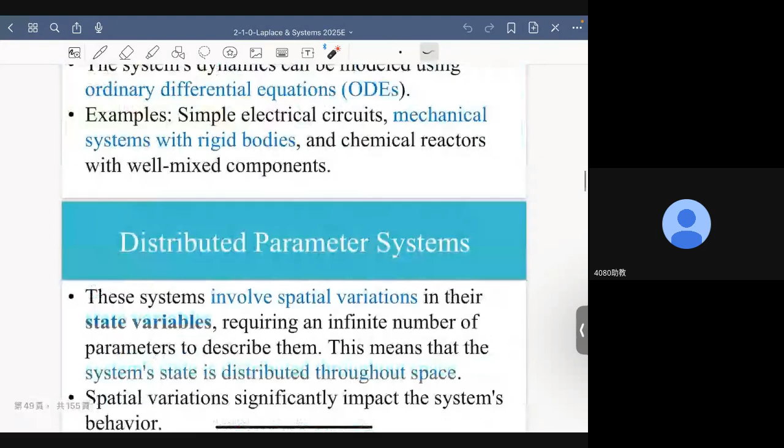OK. Now one fundamental difference between these two courses, the course of dynamics and the course of mechanics of materials, is that in the course of dynamics, we only deal with rigid bodies. We only deal with lumped parameter systems. In the course of mechanics of materials, we deal with flexible bodies. We deal with distributed parameter systems.

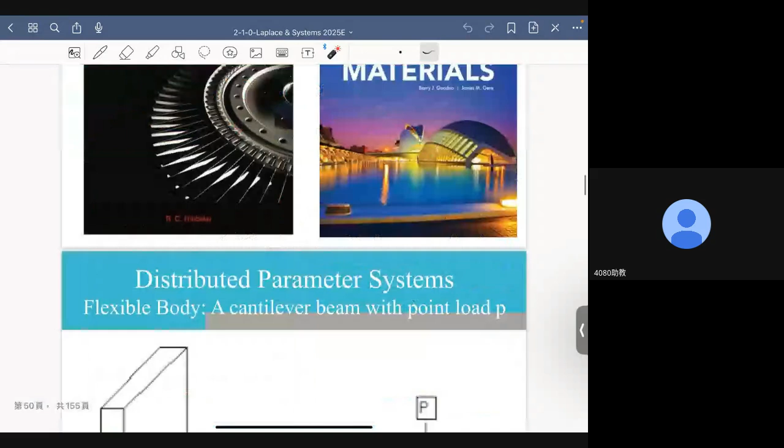For example, let's look at this cantilever beam. This is a beam. Let's say you apply a force here, and what will happen is this beam will deform. And the amount of deformation depends on two variables. One is time, the other is what? Space, right? At a different location of this beam, we have different amounts of deformation.

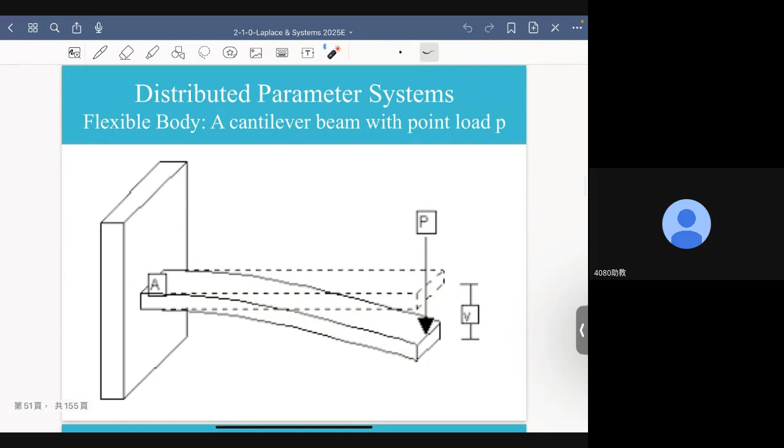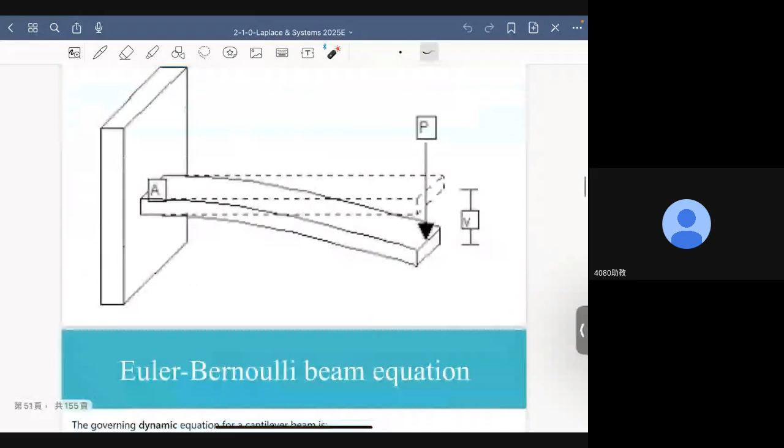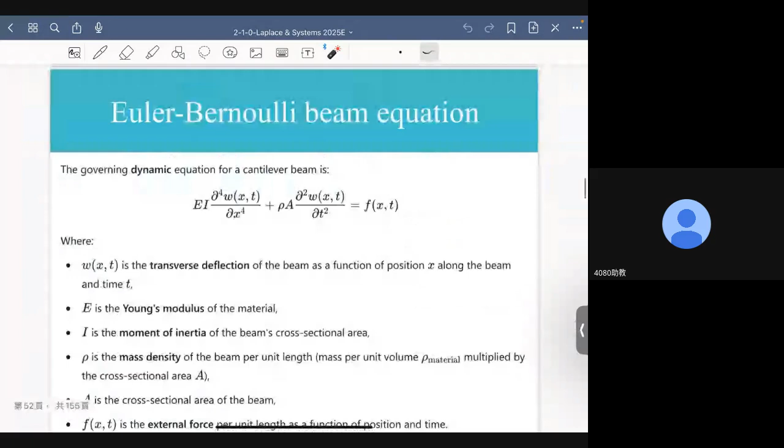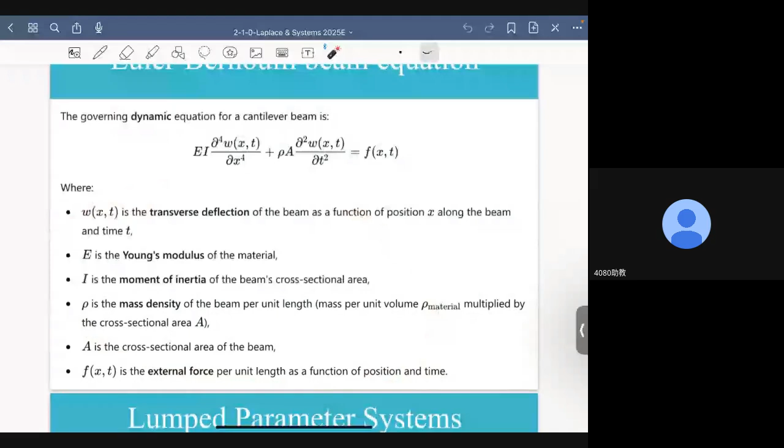And if you go to a course or a textbook of mechanics of materials, it will tell you that you can describe such a phenomenon by the so-called Euler-Bernoulli beam equation, which is a partial differential equation involving two independent variables: a variable t, which is time, and a variable x, which is a spatial variable. What E and I mean, you can find their definitions here, but it's not what we want to focus on.

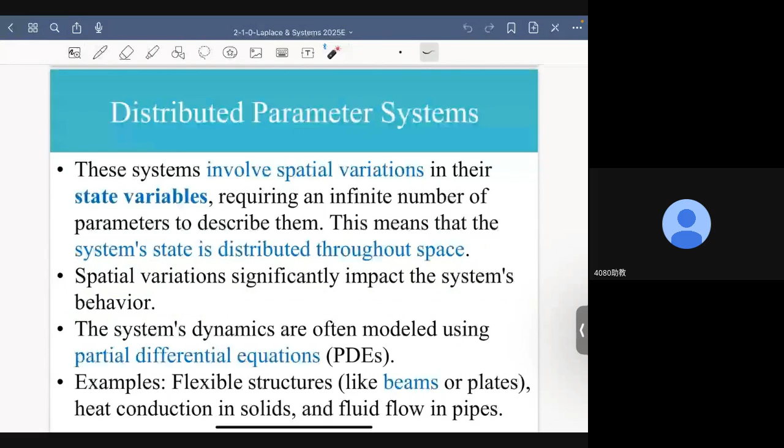What we want to focus on is that for distributed parameter systems, the system state is distributed throughout space, as demonstrated by the cantilever beam example. Spatial variations significantly impact the system behavior. This is the very reason why x now needs to be an independent variable, because the deformation of the beam depends on x. The spatial variation can no longer be ignored when we are dealing with distributed parameter systems.

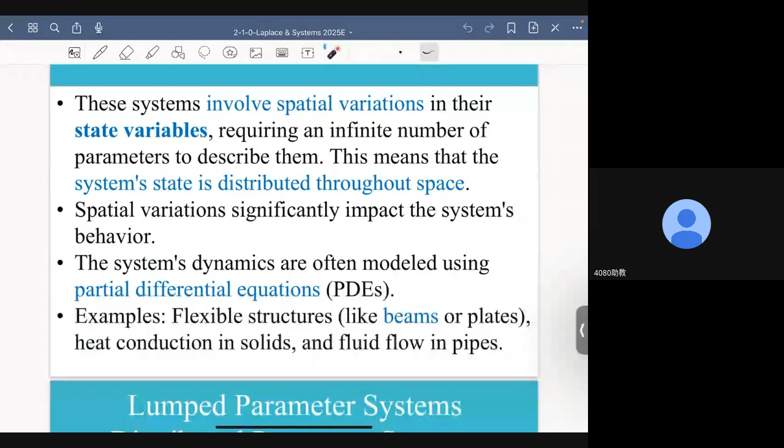So the system dynamics are often modeled using partial differential equations, which make the modeling process much more difficult, which means dealing with distributed parameter systems is typically much more complex and challenging than dealing with lumped parameter systems.

Now, a submarine is more like a lumped parameter system. It's more like a rigid body. By contrast, fish are more like distributed parameter systems. That is why the swimming pattern of a fish is much more flexible than a submarine. It can go around in very narrow space, it can accelerate instantaneously, and it can change its moving direction, I wouldn't say instantaneously, but at a very fast pace.

Similarly, a bird is more like a distributed parameter system, and an airplane is more like a rigid body. So we want to fly like a bird, not fly like an airplane, because if you fly like a bird, you don't need an airport, right? You don't need a very, very large distance to take off.

Now we will formally move into the analysis of control systems. And here I want to introduce, or help you review, one very important mathematical method for the analysis of control systems, which is the Laplace transform. Now, why do we want to use the Laplace transform? Using the Laplace transform can simplify the design and analysis of control systems.

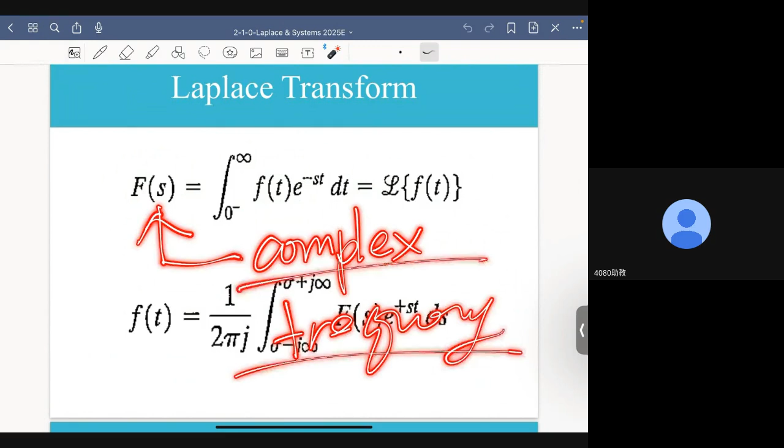Okay, we will talk about the property of complex frequency later. When you can go from t domain to s domain by using Laplace transform, you always want a way back. If I can go from t to s, can I go from s to t? I can do that by using inverse Laplace transform, and this is the formal definition of inverse Laplace transforms.

Typically, we are only interested in Laplace transform, not inverse Laplace transforms, because you don't need to perform inverse Laplace transform by yourself. You can always look at a Laplace transform table for inverse Laplace transform results. That is one reason. The other reason is that it's really not important for control system analysis, but understanding Laplace transform, by contrast, is of vital importance for the analysis and design of control systems.

Now let's look into the definition of Laplace transform to get a better picture of what it really is, starting from its lower bound and upper bound. The lower bound is actually starting from 0 minus. In control, we are usually interested in the causal response of the system. What is causal response? Causal response is the part of the response due to the input applied at t larger than or equal to 0, which implies that the input is initialized at the time t equal to 0. In control, what we are interested in is the causal response, the response caused by inputs.

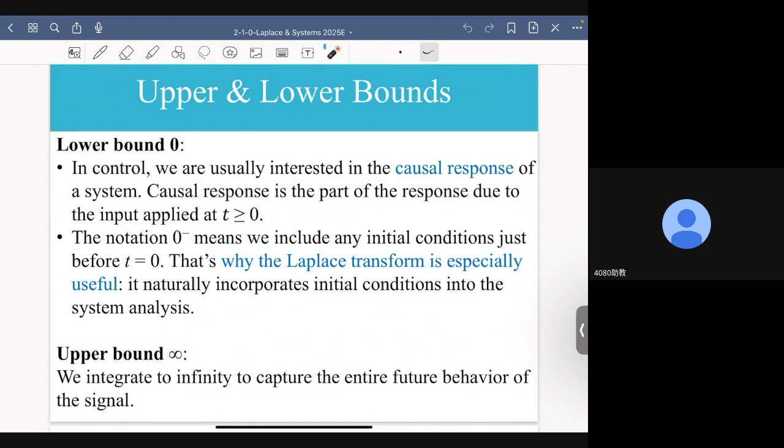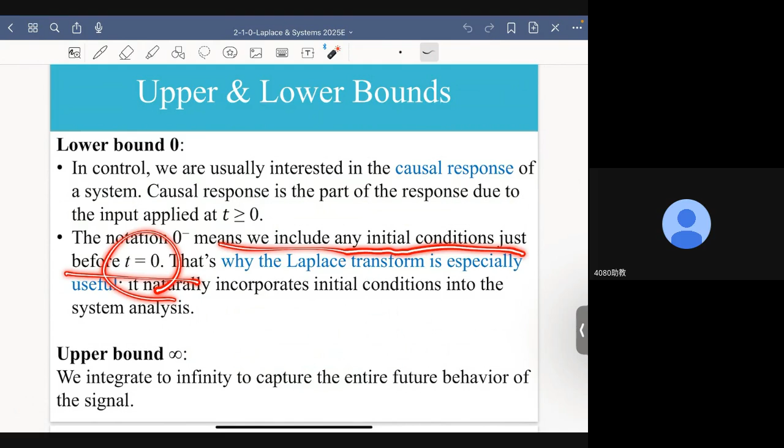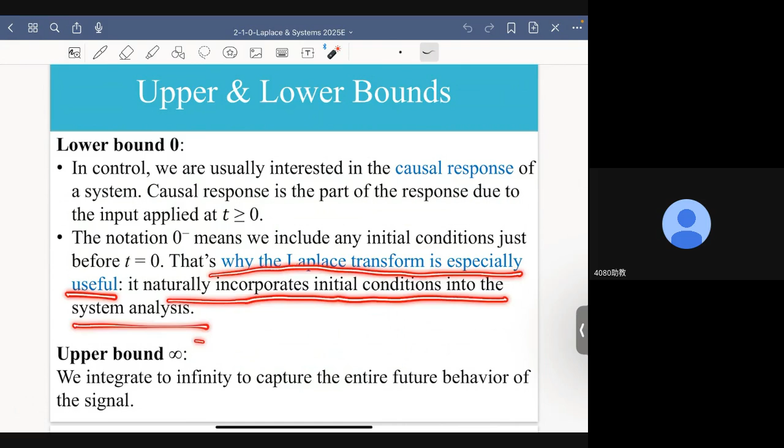Other than causal response, what is the remaining part of the response? As we shall see later, the response caused by initial conditions. The notation 0 minus means that we include any initial condition just before t equal to 0, which is the time instant of the application of the input. That's why the Laplace transform is especially useful. It naturally incorporates initial conditions into system analysis. So the reason why we have here not 0 but 0 minus is that Laplace transform takes initial conditions into consideration.

Because t equal to 0 is the time instant the input starts to have an impact on the system, and 0 minus means right before the application of the input. So it fully describes the state of the system before the application of the input; therefore it fully describes the initial conditions.

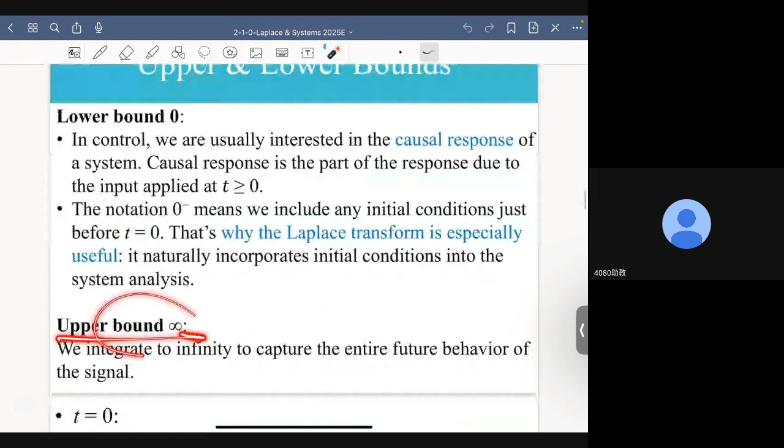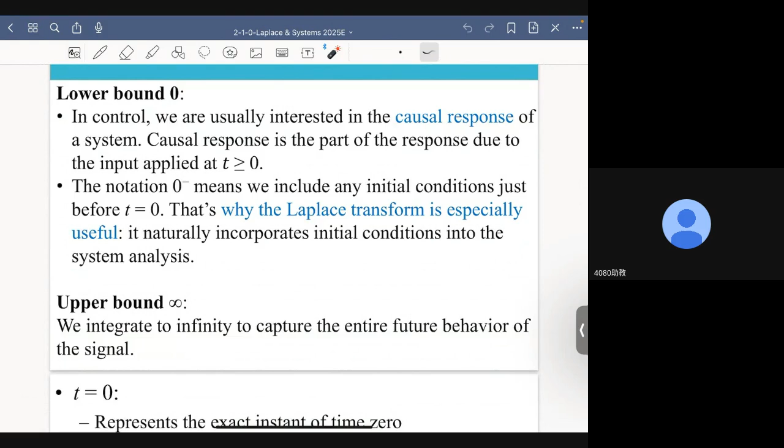Now, upper bound. Why is the upper bound infinity? Because we integrate to infinity to capture the entire future behavior of the signal. We don't know how long a signal will last. We simply have no idea because there are so many different kinds of signals in the world. So if that is the case, I just take the integration to infinity, and that will take every possible future behavior into account.

Let's spend more time on the specification of t equal to 0. T equal to 0 represents the exact instant of time 0. And t equal to 0 plus means t approaches 0 from the positive side. It represents the instant immediately after t equal to 0, and it is used to define the system just after the input is applied. It excludes initial conditions or the instantaneous change at t equal to 0.

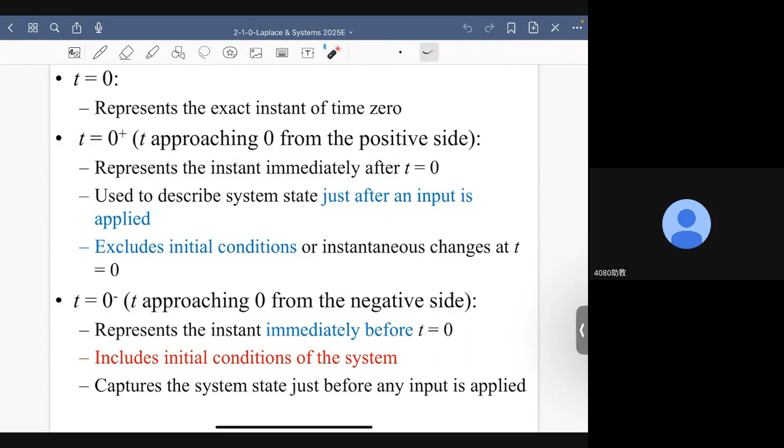By contrast, t equal to 0 minus means t approaching 0 from the negative side. It represents the instant immediately before t equal to 0. Therefore, it includes the initial conditions of the system. What really makes a difference is the application of the input. Because once you apply the input, you create a discontinuity between before and after the application of the input at t equal to 0. Therefore, we need to distinguish 0 plus and 0 minus. Where does the discontinuity come from? Input.

If you find me repeating the same thing again, it does not mean I suffer from dementia. I don't suffer from Alzheimer's. Not yet.

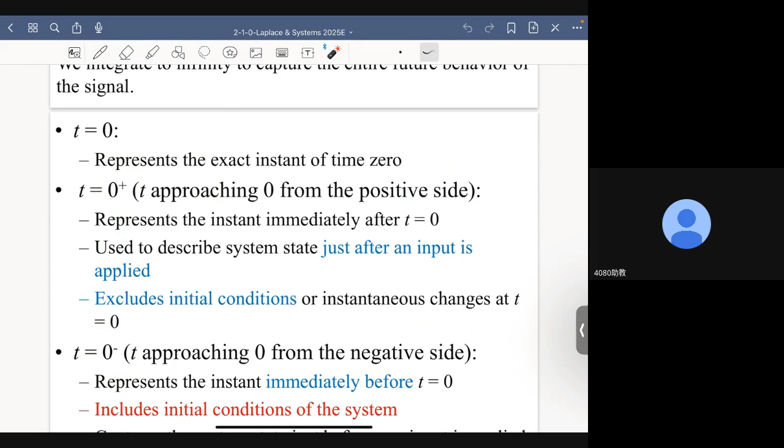I do that on purpose. I repeat the same thing again only when I think the concept is of great importance, and I want you to learn it by heart. That is, I want you to memorize them, to always have a good idea of what it is, because it will be very important.

Now, we talk about useful signal models. The first useful signal model we introduced is the unit step function. Remember that the equality sign is at t equal to 0, which implies if the unit step function is the input of the system, then its influence on the system begins at t equal to 0.

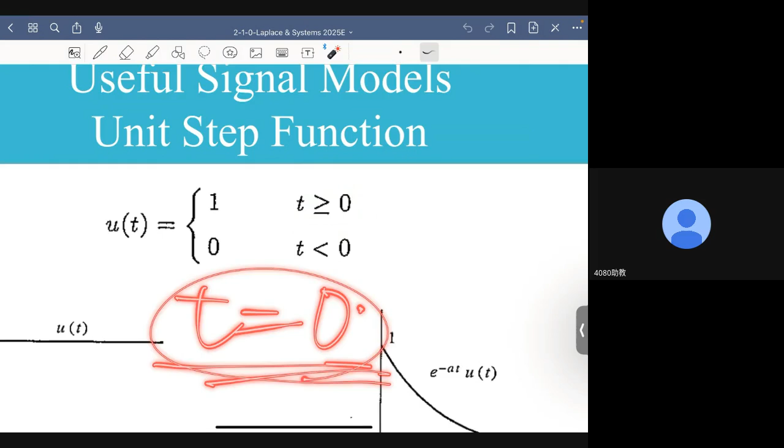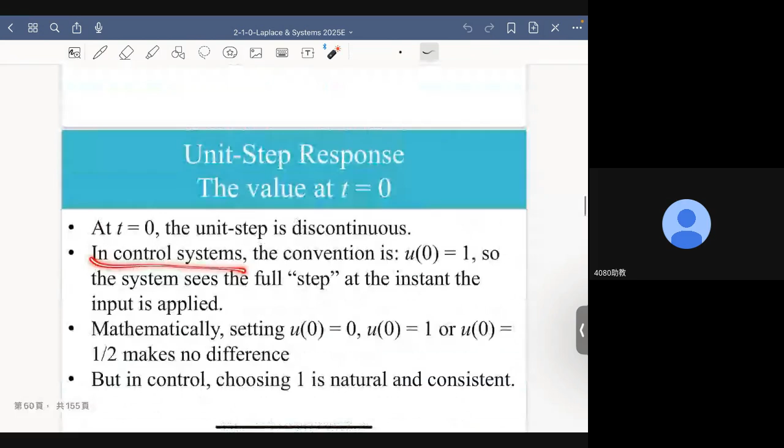So at t equal to 0, the unit step is discontinuous, okay? In control systems, the convention is u of 0 equal to 1. So the system sees the full step at the instant the input is applied. Okay, that is exactly what we need. That is exactly what is really happening in a control system.

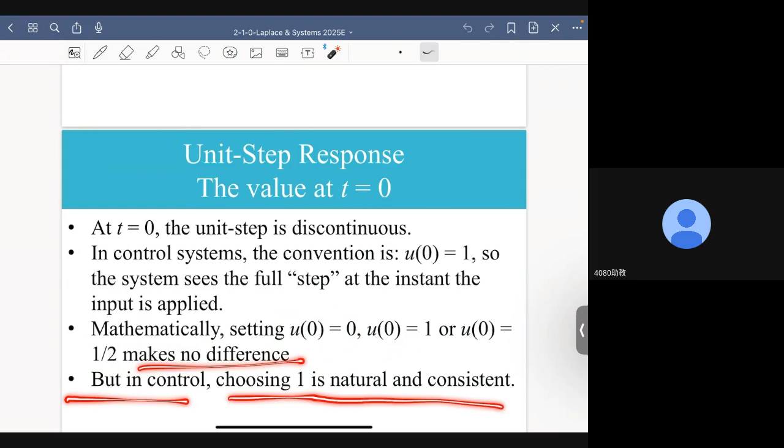Mathematically, you can assume u of 0 equal to 0 or 1 or even 1/2. Mathematically, it doesn't make any difference. But in control, choosing one is natural and consistent. Okay? Now, let's go to Laplace transform. How do you determine Laplace transform? Okay, the answer is very simple, just based on the definition of Laplace transform.

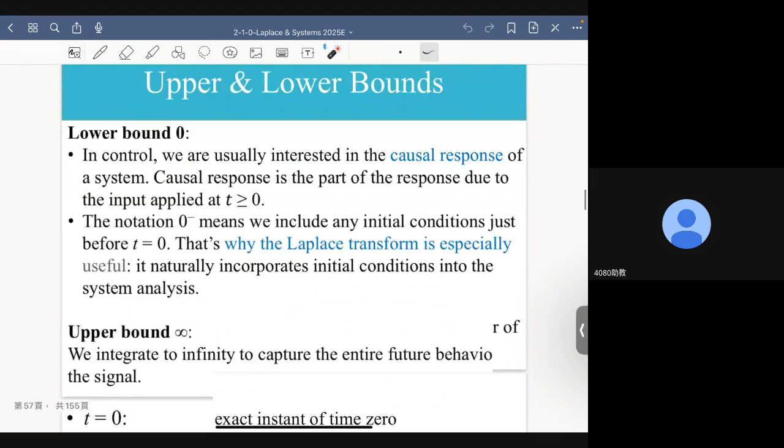Let's say I want to know what is the Laplace transform of 1. So I just use this definition of Laplace transform. Let me choose f(t) as 1 and see what happens. Okay, if I choose f(t) as 1 and I perform integration, I won't go through the mathematical process step by step. You can do it yourself. Okay, you have to do it yourself, please.

Okay, you take the integration. This is what you will get, and remember that here what we have is a definite integral, which means you have to plug in the upper and lower bounds, and this is what we'll get. Okay, so the Laplace transform of 1 is actually 1 over s. Similarly, the Laplace transform of the unit step function is also 1 over s.

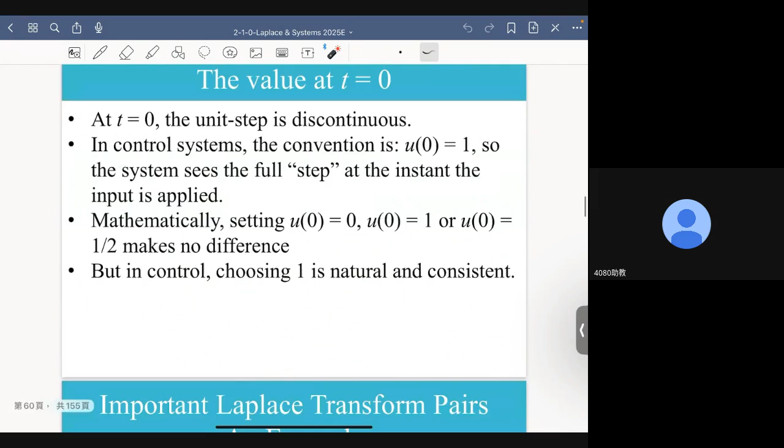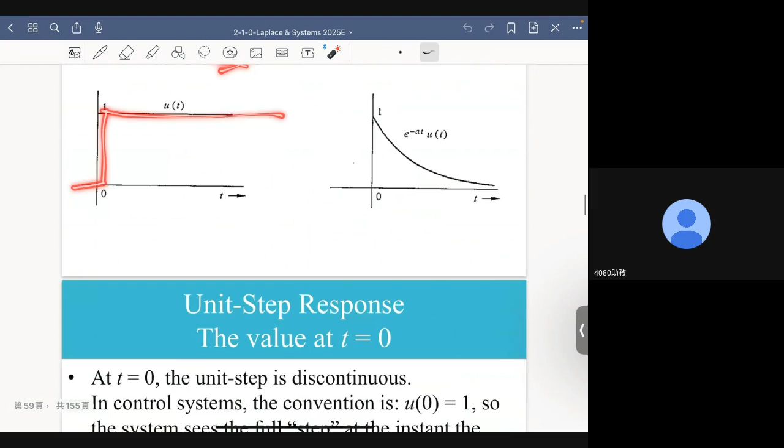Now remember, the unit step function is not really 1. Okay, if it is 1, it means its value should look something like this. But it actually looks something like this. Okay, it only has the value of 1 when t is larger than or equal to 0. So why do I have the same Laplace transform? Why is the Laplace transform of the unit step function the same as the Laplace transform of 1?

The answer is really very easy. Because when we take the integration, the lower bound starts from 0. Okay, so it ignores what happened before t equal to 0. Okay, this is the reason why the Laplace transform of the unit step function is 1 over s. Okay, all right.

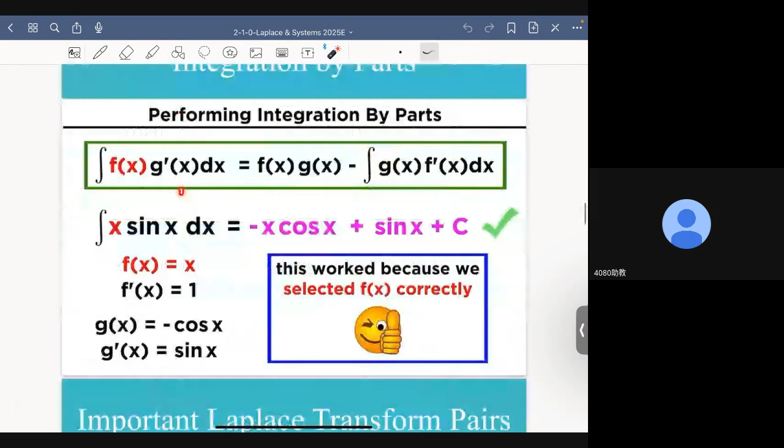Okay, let's say again, this first result is based on nothing but the definition of Laplace transform, and then by using the technique of integration by parts, by assuming f prime here is nothing but g prime of x, and e to the minus st is f of x, and I use this formula, and this is what I will get. Okay, and this is the result.

This equality tells us the Laplace transform of the derivative f prime is actually s times F of s minus f of 0. Remember, what is F of s? F of s is, of course, the Laplace transform of f(t).

All right? So if you look at this result, you'll see that the derivative of f actually consists of two parts. The first is the initial value of f. This is the initial value of f. The second part, which is more important, is s times F(s). Remember, F(s) is the Laplace transform of f(t).

What does that stand for? That means when the signal is converted into the s domain, the differentiation operation in the time domain is converted into a multiplication operation. That is, if you take a derivative in the time domain, what you end up with in the s domain is you multiply the function by s, and that means a multiplication operation.

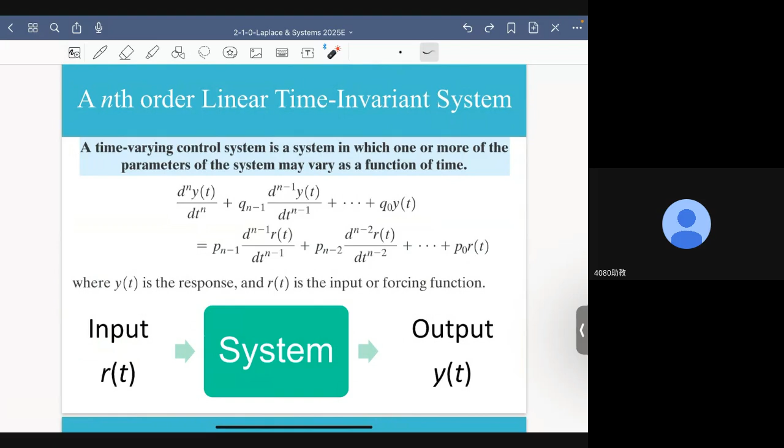Now, the next thing we want to do here, which is very, very important, is we want to use Laplace transform to help us design and analyze our control systems. Now, in this course, what is our system? Our system is this so-called nth-order linear time invariant system. Okay, it's a linear differential equation.

What is the single most important property of a linear system? Superposition, superposition, superposition. Okay, I said it 3 times. I repeated it 3 times because it is of great importance. Linear systems have to obey the rule of superposition. What is the rule of superposition? Check it out yourself, okay? Please check it out yourself.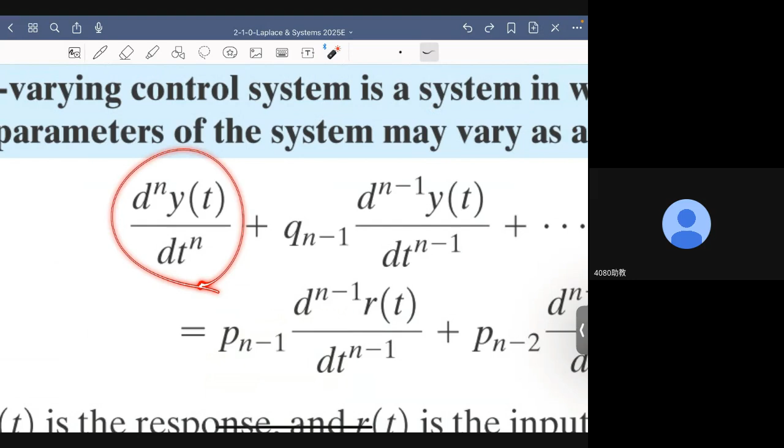Okay, now, first of all, it's a linear differential equation. Second of all, because all these coefficients are constants, this differential equation also represents a time invariant system. Now, the reason why it is nth order is because the highest derivative of the output is the nth derivative. That is why we have an nth order system, okay?

Now, by contrast, a time-varying control system is a system in which one or more of the parameters of the system, that is these coefficients, may vary as a function of time, okay? Again, R, which appears on the right-hand side of the equality, is the input. The system itself is the ordinary differential equation, and the output, of course, appears on the left-hand side of the equality, and it represents the solution of these differential equations, okay?

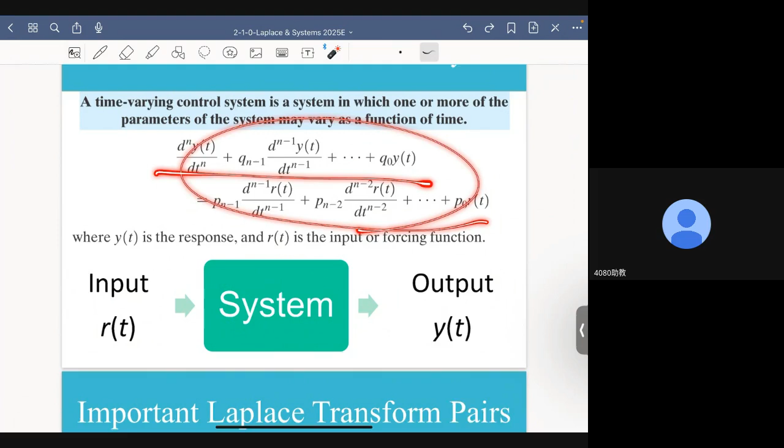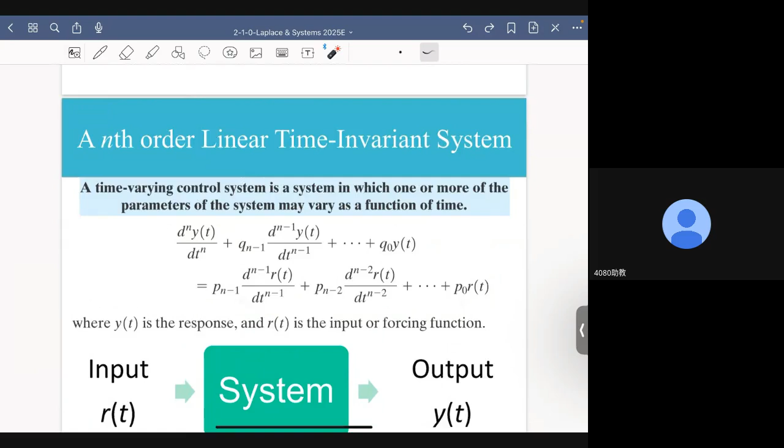Now, in these PowerPoint slides, we again review the result of the Laplace transform of the derivatives of signals, all right? I'm sorry for the Chinese that appears here, but I'll cover it with my speech. Let's consider a time invariant system. This time invariant system is identical to this system. The only difference is that here we have P and Q for the coefficients, and here I have A and B. Other than that, they represent the same thing.

Now, to simplify the following mathematical derivation, I will introduce a mathematical symbol, which is the differential operator. A differential operator is defined as this. It's denoted by D, and it represents the operation of differentiation. So if D equals this, then D squared, of course, equals the double derivative.

Now, when I say D squared, it's really a misleading representation, because it seems I'm saying that I have to multiply D twice. This is not the case. I cannot multiply it. Why? Because D is not a variable. D is a mathematical representation. When I say D squared, that means I perform this operation twice.

Now, if this is the case, then this term can be rewritten as D^n y, and this term can be rewritten as D^(n-1) y, and so forth. The same thing happens to the right-hand side of the differential equation. So after the introduction of D, this differential equation can be rewritten as this. Apparently, this representation is much more concise. Q of D is given here, and P of D is this. Nothing fancy happened here.

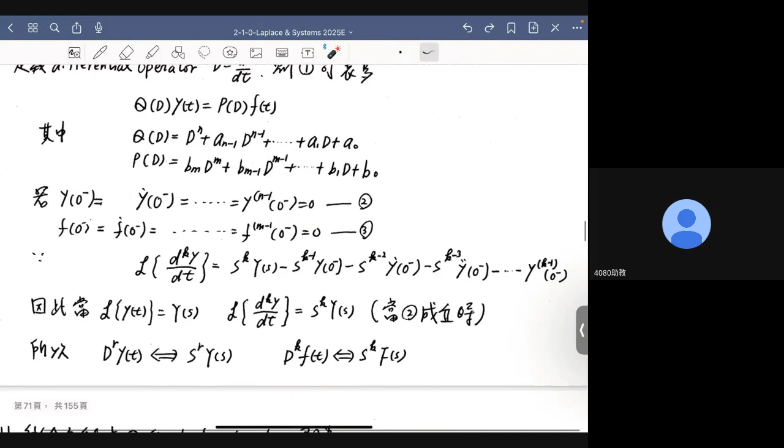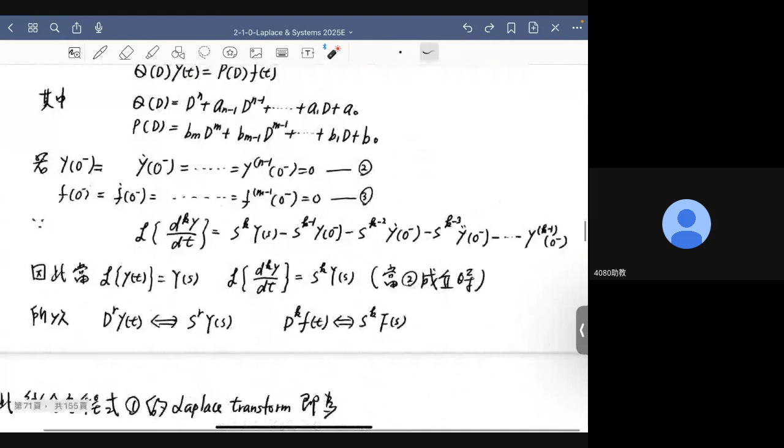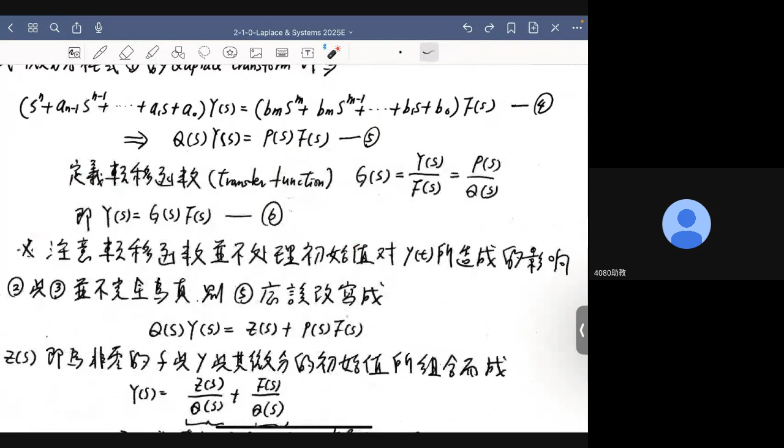So this is Q of s, and this, based on the definition given here, is P of s. This is what I get if I take the Laplace transform of this differential equation, assuming all the initial values are zeros, transforming it into the s domain, the domain of complex frequency. Let me rewrite it as equation 5, which again is a very compact, concise representation.

We love that because as engineers, we like simplicity. We hate complexity. If I can simplify matters, that will often be my choice.

Now, the next thing I want to do is introduce a very important term, which is the transfer function. The definition of the transfer function is the ratio of the Laplace transform of the output to the Laplace transform of the input. So G of s is actually output versus input. It gives us a very solid piece of information on the relationship between output and input.